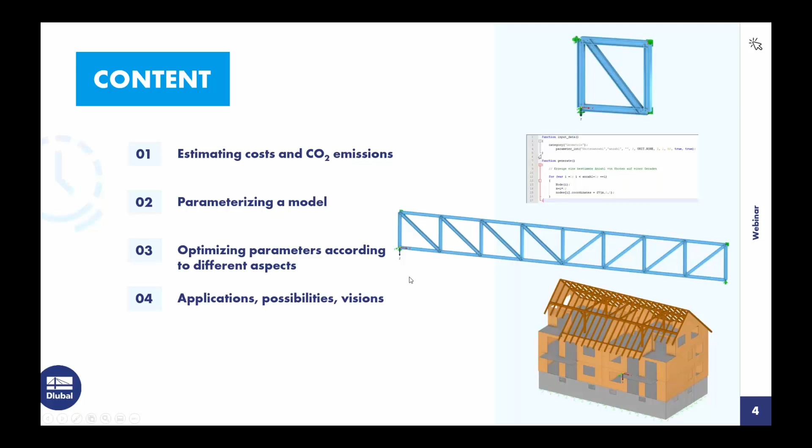Finally, we take a look at these cost estimations and CO2 emissions on a typical user structure, something like this apartment building structure here. So this is now the sign for me to change to the program, because I want to show you this live today. So I close this window and jump into RFEM, our new generation program.

Before we start with optimization and so on, we have to define a new model first. For example, I define a name, let's say PO1, and specify my tasks, what I want to do. When I speak about tasks, what's essential, I always change into this register, add-ons. This register shows you all our add-ons available in the program: design add-ons, analysis add-ons, special solutions, and here our focus add-on today, optimization and cost, CO2 emission estimation.

I agree, it's a quite complex name, but it should show you what it can do. It also has a special place in this menu because you see it's not allocated to special solutions or analysis add-ons. It's in this lower right corner, which should show you that it covers globally these design add-ons, but also the other add-ons. It lies like a skin overall, because if you want to optimize something, you have to consider nonlinear material and also designs.

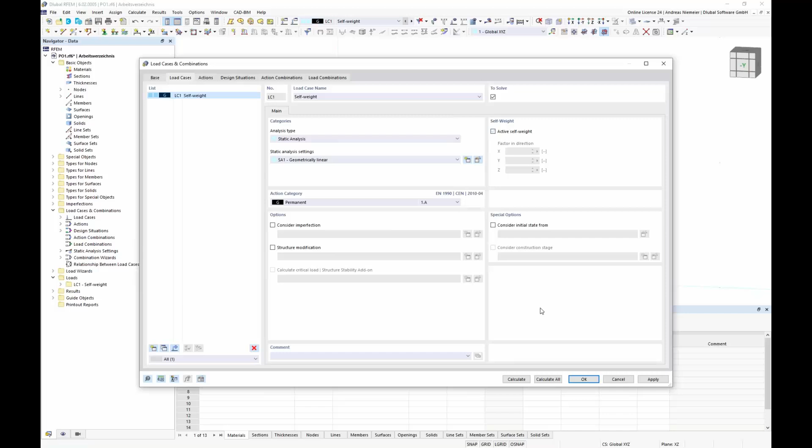There is no surface, no member, but I want to show you first which boundary conditions we have. So this means I want to load this element with a typical load, let's say with a unit load here. So no self-weight. I apply here only a nodal load, for example 100 kilonewtons, and this 100 kilonewtons should be carried from this element to 2 nodal supports on the left side.

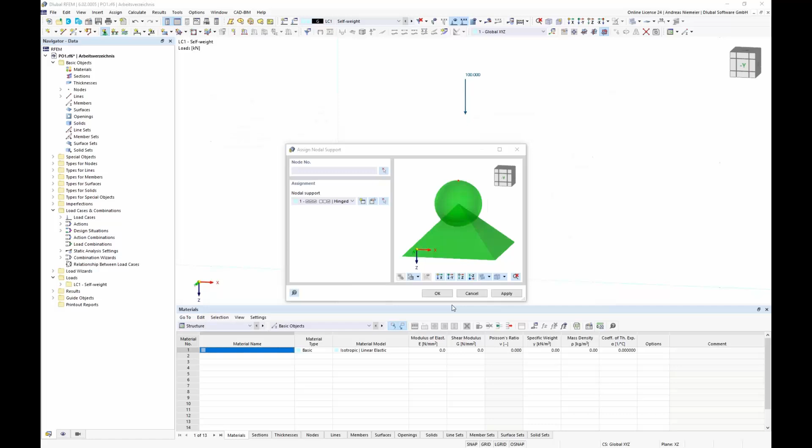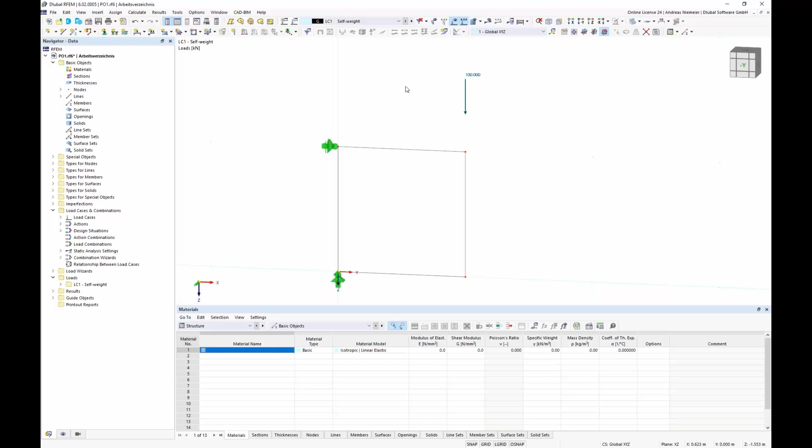So here the nodal support is on the bottom corner, a translational support in all directions. On the upper side we make also a new nodal support, but without having any constraints, so I place it here. And so that this structure cannot rotate around the global z-axis, I place also here 2 supports in y direction. So these are my boundary conditions and should show you my target place where I want to operate now.

So if you see this load and you see these supports we have, our task is how we can carry this force down to these supports. I can create here now, for example, a wall or a member set or a mixture of both or a solid. So everything is possible.

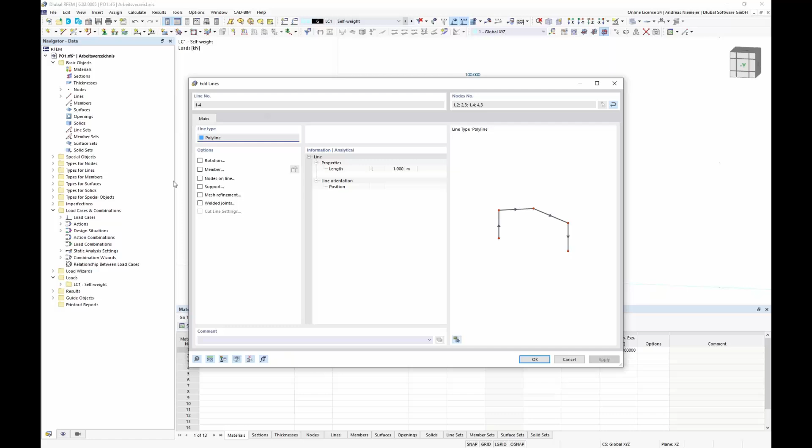But for explanation today, I use simple members. So I select all 4 lines and assign a member here. So go to options, member. I take here the member type beam and assign here a cross-section.

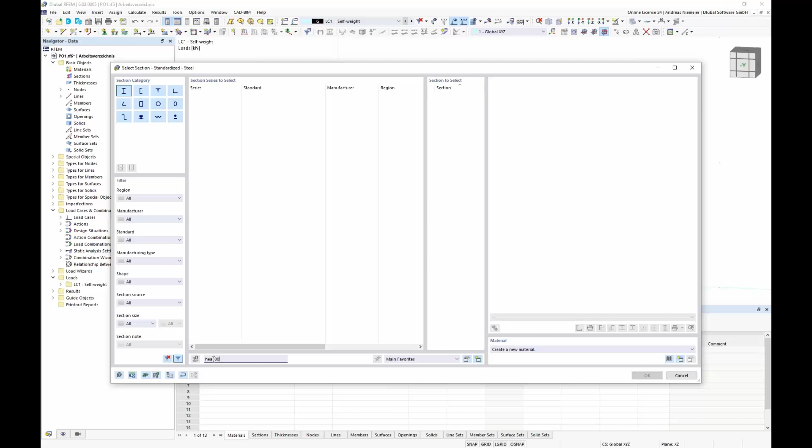For such examples I use always my favorite cross-section, an HEA 100, of course with writing a space here, and I select it here with a standard steel, so steel S235. So okay, after confirmation we get now these 4 HEA members.

They are connected, rigid, but this plays no bigger role here. It's only a structure what can carry the force down to the supports. This we can also check. So if I run the static analysis, you will see that we get here, of course, deflection.

So we have here 14 millimeters deflection, and of course we get here internal forces, normal axis forces, here tension, here compression, and even bending. So we can realize that this shear is transported via bending to the supports and produce here reactions.

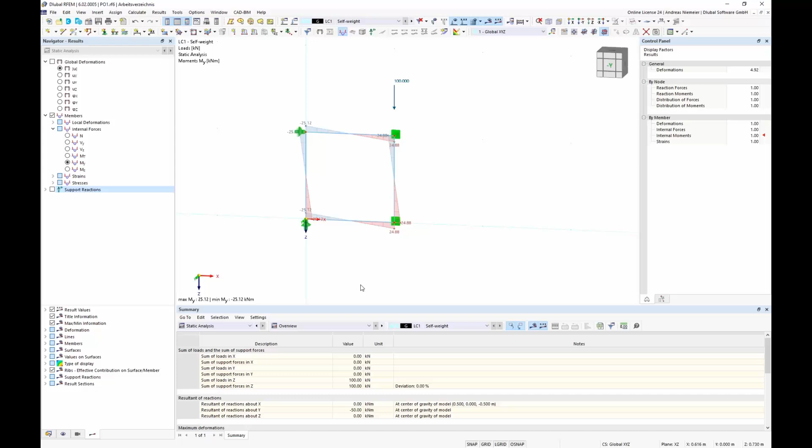So far everything is as expected, but as structural engineers, if you see this structure and even if you see this deflection shape, you would say, yes, nice structure, but we need a bracing in it. And I agree, I would also model here a bracing, but I don't want to tell the computer now what is the perfect place of the bracing.

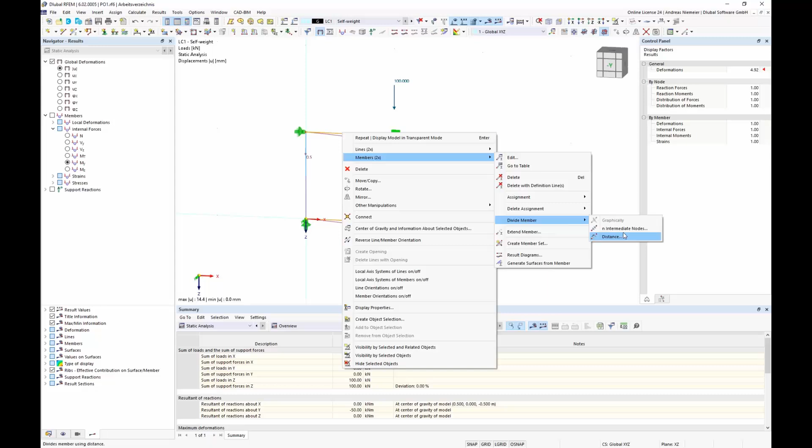I expect from the computer that he will tell me what is the perfect place of the bracing, and therefore I say here now, please have here a bracing in the middle. So I divide the member with intermediate nodes, create here a middle node by placing the node on member, and then I take here one leg and copy it here in the middle. So far we have now a bracing.

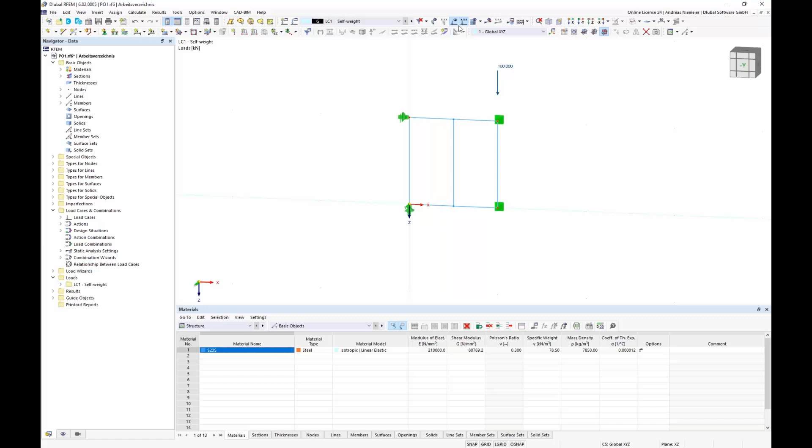I don't want to say now if the place or orientation is good, it's only a, let's say, stupid bracing. And if we run analysis again, we will see, of course, this bracing increased the stiffness, and we could reduce the deflection to, let's say, 8 millimeters. But the deflection shape is still the same, and we can think about the orientation or inclination of the bracing.

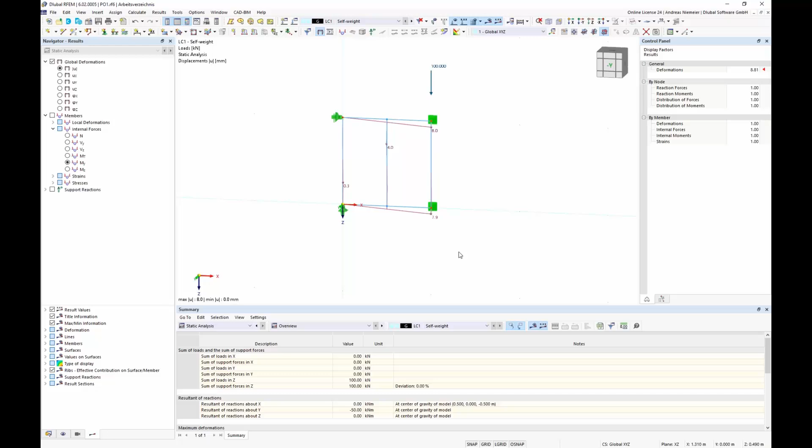And I would say now this is a job for RFEM, for the computer itself, and that RFEM can find a right place for this bracing. We have to give the computer the information about what he can change to find the right place. And here it's clear for us we can maybe move this node in left direction or right direction here, and even here move the node in left or right direction.

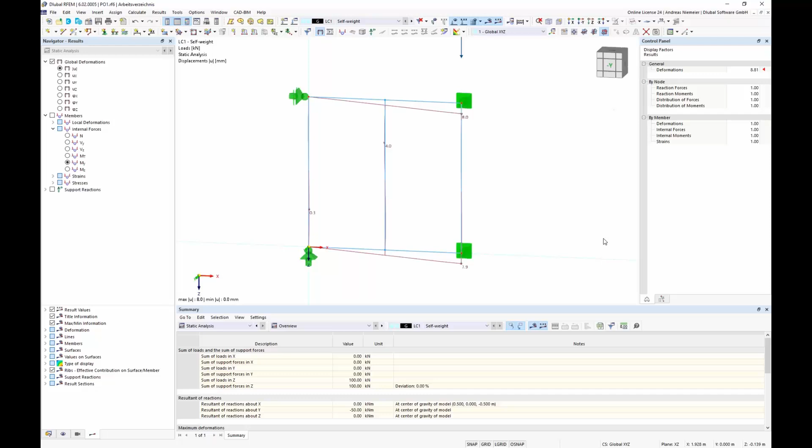For this I define two parameters. I go here to edit, global parameters, and here I have a parameter list where I can specify - I say the first parameter is x top, and the second is x bottom. The parameter gets the unit type length, with in this case 0. Of course I can write a value here, but I want to have 0.

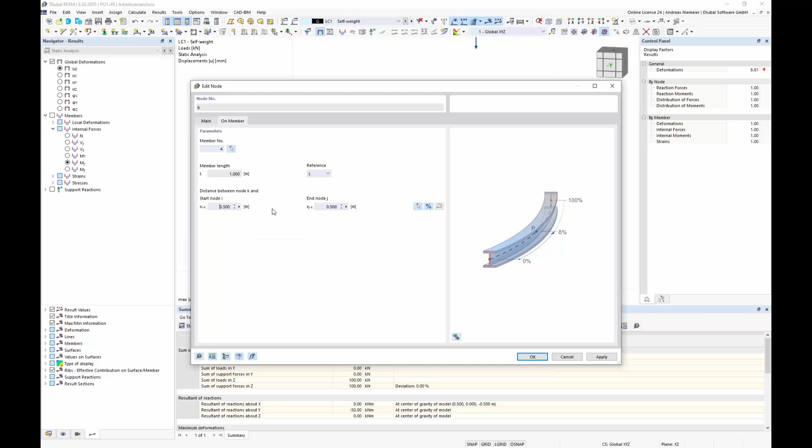Now I use this length parameter to place and move this node. For this, you go into the node properties, change here to length definition, go to this black triangle and open this formula editor. You see you have a big white box where you can write a lot, and we can say here 0.5 meter plus x top. You see the program calculates directly the result of this parameter - it's 0.5 because x top is 0.

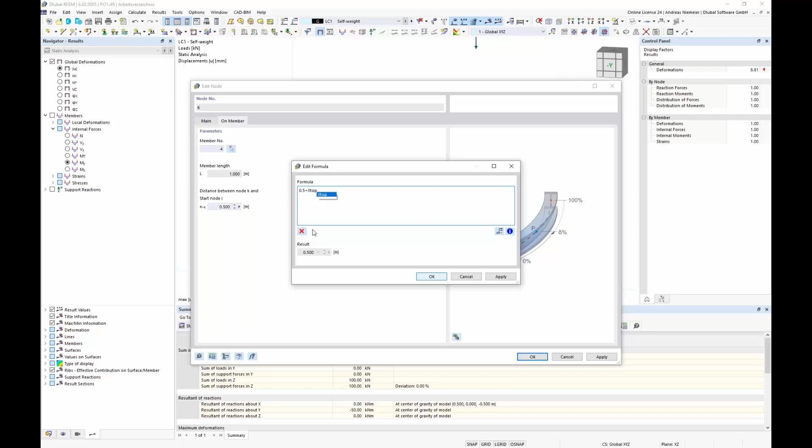But when we go into this parameter list and change this parameter to 0.1, you will see the program is moving this node. So we connected now the geometry to this parameter. The same we can do for the bottom.

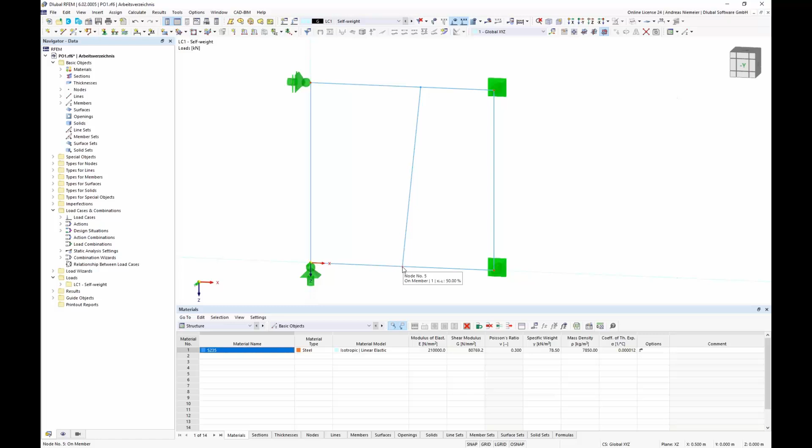Here I want to go one step further. What we wrote in this formula editor was 0.5 as a fixed value. But what happens if you move this node and it's not 0.5 but something else? So to cover this, you can go into the node details, change it to meter or length as before, and open it again.

But maybe you realized we have two buttons here. The button with the i is an information button which gives you a command list of what you can use to connect to properties of the program inputs. This is JavaScript style and allows you to connect to every element of the program by a JavaScript code.

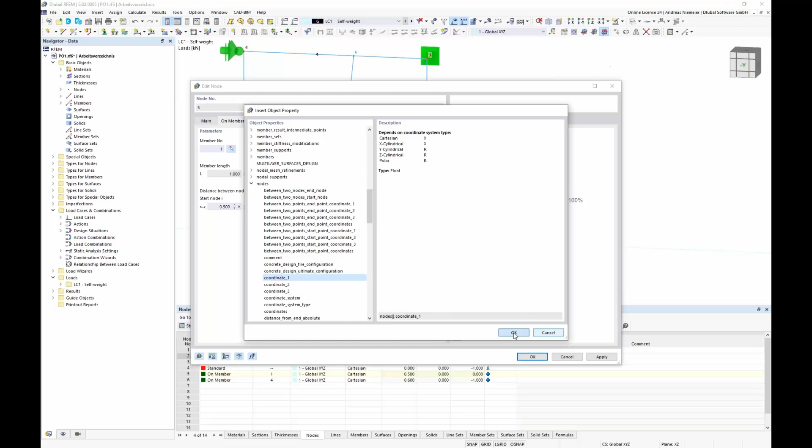For example, if we want to connect to the node coordinates of node number 2, we can go again into the node property, formula editor, and type 'n' for nodes - you see you get commands for what touches the node. For coordinate x you will see you can connect to the x coordinate. If you confirm this command and write node 2, you get the value 1, which is written in the table, and you can divide this by 2, giving us half a meter plus x bottom.

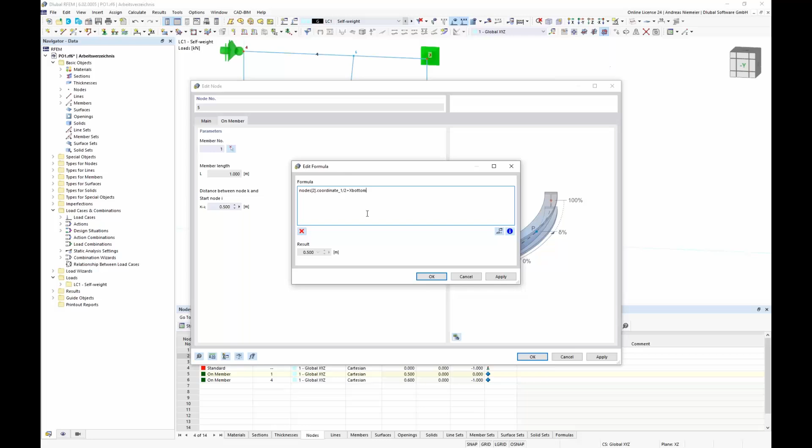So you can write your own code to work with values of the input data itself, enabling you to make a good parameterization of your model. Now we have an option to change this bracing member in both directions by typing in these values. Of course this is not the optimal place - it's much more optimal when we move it completely to the right and left side. But this is the task of the computer later.

So now we have done this parameterization, but the question remains how the optimization can work with these parameters. The optimization, which we activated in the base data, enables you below to call the optimization settings menu. You see here you have a few options and values to optimize. Unfortunately this list is empty, because we have to declare which variables of the formulas of the global parameters should be optimized.

For this, if you open the scheme again, you will see below the column 'definition type' a few options - we have values, formulas, optimization, and some special types of optimization. If you give this parameter the type optimization, you will see it going red. This means something is missing, and the cause is because it wants a range for optimization - from which value to which value the parameter could go.

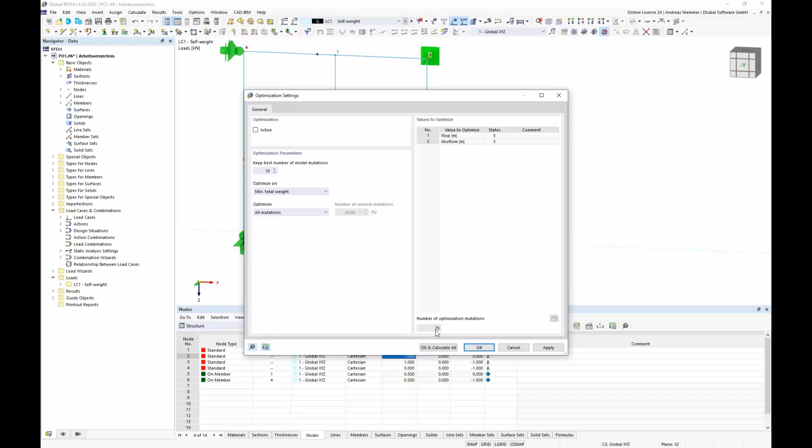So there exist 25 different situations, what means for us 25 different models where we have different geometries in this case. And we defined here the name mutations for these different models.

And now if we want to find the best solution, let's say best in brackets, we can maybe activate it here with this check, and you get 3 options to specify. The program asks us keep best numbers of model mutations, and here is written in standard 10.

The question is best models. Of course, here we speak about 25, so it's not so crucial. But you can also work with 1 million, then you don't want to read 1 million. So it's interesting only to store the best 10 results. But for our upcoming analysis, we can write all, only to understand what happens.

Then, because the word best cries to the question, what is the best? And here we have to specify below the chapter optimize on when the program is changing these variables. The question is, what is good? Should he find a minimum total weight? Should he find a minimum vectorial displacement, deformation, minimum cost, or minimum CO2 emission? So you see, this is a criteria. For our first try, I use maybe vectorial displacement.

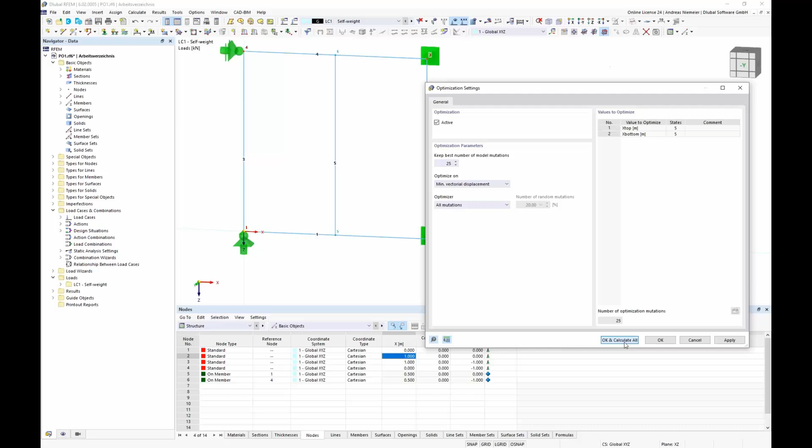And if we do this, and start here OK and calculate all, the program is opening a calculation process, but it's looking a little bit different. It's a more optimization process where you see which optimizations are done.

And in background you see what is changing. He calculates the different mutations, and even if he finished the calculation of one mutation, he logs it down in the table connected to these 10 best results, for example. Now we log down to 25 best results, and you see he has here measured the vectorial displacement and the corresponding parameter set. The best vectorial displacement, for example, here happened now with solution number 5.

If he moves the top node 0.4 meters right and the bottom minus 0.4 meters left, so this is, let's say, our expected place, what is really good. All others are not so good, so you see we get here bigger deflections. But of course it's a stupid process because he calculates all available.

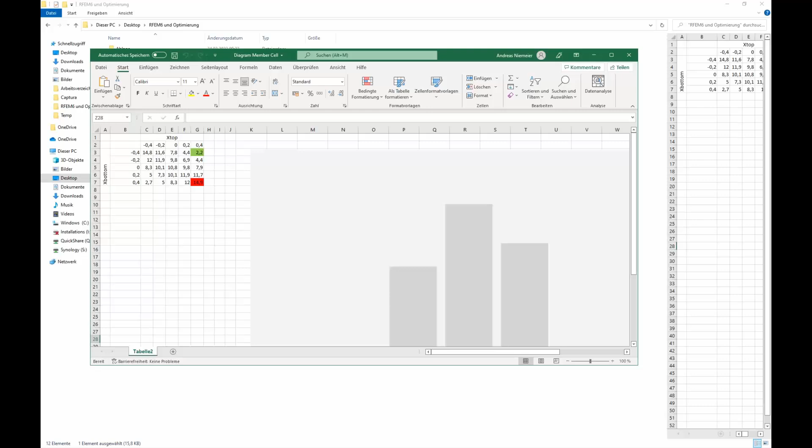To understand it much better, I defined here a spreadsheet with a diagram to explain it in a different way. So I interpreted all these results, what this process gives you, here with a surface diagram with this matrix.

And you see we have here our x top and x bottom value, what running from minus 0.4 to positive 0.4. And if we set maybe parameter 0.4 positive and at the same time the bottom to minus 0.4, we get the minimum deflection. We end up here.

A second minimum we get maybe if we make it vice versa, minus 0.4 and positive 0.4, then we get here this minimum. But if you see all other solutions have here a buckle that gives us bigger deflections, are not so good. And now you see which result space the program is working on, and then regarding this situation we are interested always in these minimums here.

If we jump back now to our program, you see meanwhile he's already done with his analysis. He's on the 22nd solution, and meanwhile the list is filled with the results I just presented on this matrix.

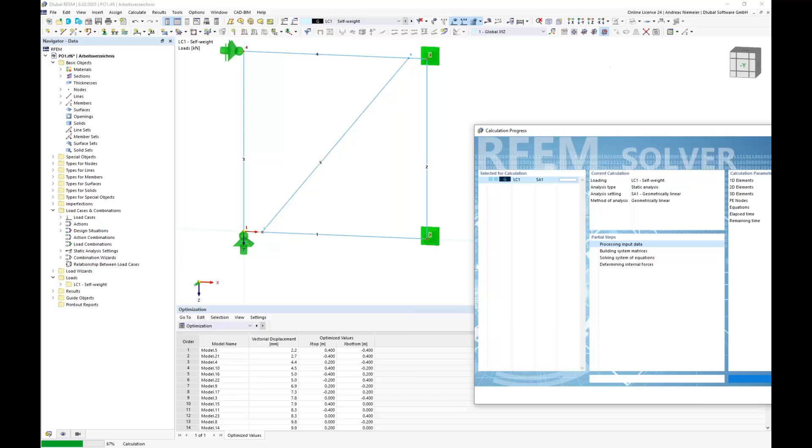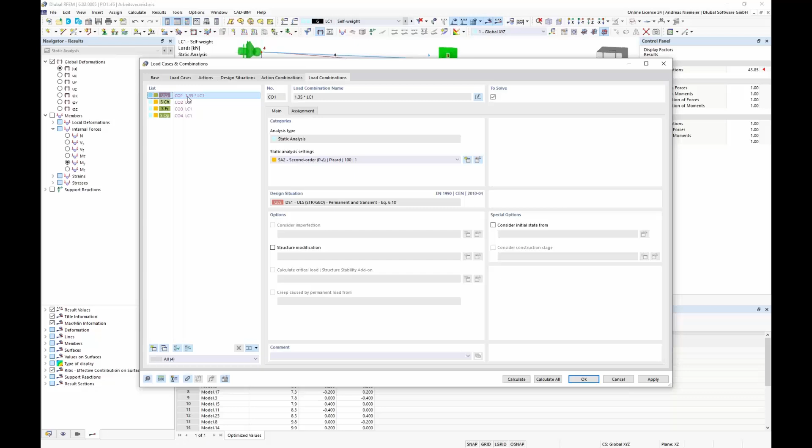Of course he also calculates some stupid solutions, but this comes only from the process of trying to use all values. What I want to show you with this step is that you have to wait at least the calculation for 25 models to get a result, to find out that maybe model 5 with this parameter layout gives the best result. We have here 2.2 millimeters, but this comes because the program is directly considering this design situation with increased values, where there's this partial safety factor — when we calculate this, you get exactly this 2.2 millimeters.

So now the question arises, can we do this faster? And yes, we can. So we set back this structure to its original place — this is the best parameter set that he found. But we ask the program again to find this solution much faster with a learning process.

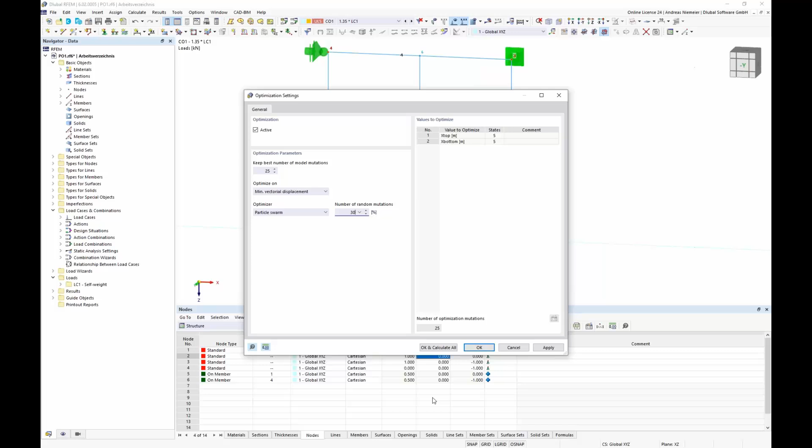We go back to this menu, optimization settings, activate it again, and say now please use as optimizer this particle swarm algorithm, which is a learning process using only a fraction of all possible variants or mutations. So I say, as a basic input, for example 30%, which means 7 elements of all, and the task is now to find a good result within the calculation of 7 mutations — and for this he has to start the process.

For this he has to start with a random selection of parameters, do its calculation, and realize, okay, my first calculation gives not such a good result. Then he tries to find a better parameter set by knowing what gave him a bad result, and finding a better deflection until the 7 mutations are over.

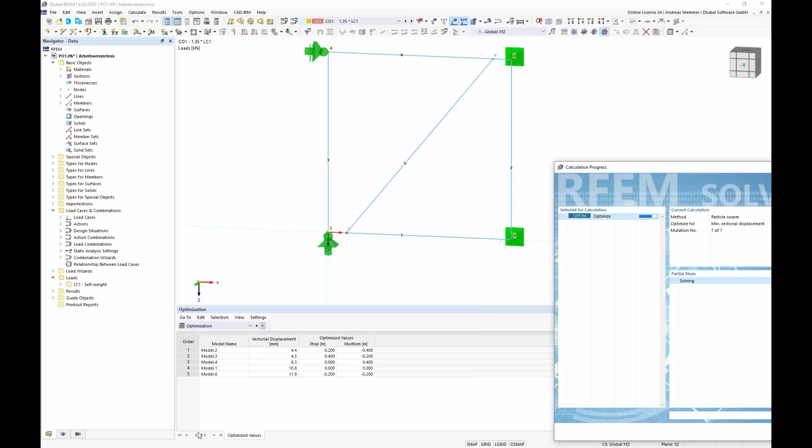So his game is to find a good solution within the 7 solutions. And you see now the program was able, by using this self-learning process, to find within the calculation of 7 models a really good solution. Maybe he already found the best solution here, but that's not a must-have.

The case is more to find as good a solution as possible, but you can save time with this process, because he learns — maybe when he first starts with such a solution — that he has to change the parameter to get a smaller solution, and then he can learn that he shouldn't increase the value in this direction but more in that direction.

This particle swarm algorithm, or the algorithm behind it, imitates or mimics the behavior of an animal swarm — for example a fish swarm or bird swarm — where every individual, which here is maybe a set of parameters, tries to stay as close as possible and not travel away from the group. So he doesn't search places in the outer space, and also the individuals don't occupy the same place, so he doesn't find solutions that are similar, always searching in the same place.

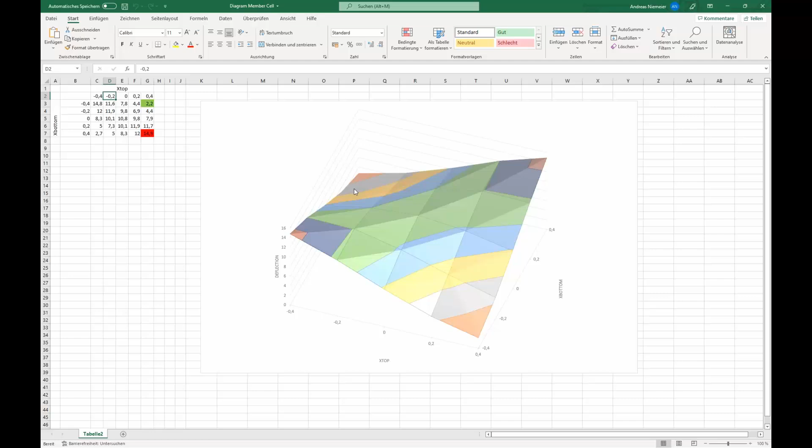And because these swarms have a need to rest, maybe in reality, the need increases as they get closer to the resting place, and mimicking this behavior helps to find these optimums here on this corner or that corner. So maybe we could prove this a little bit with this short introduction.

Now I want to open this topic by mentioning what we can use this for, because if you take a look at this cell, it's part of a truss girder, for example. And now the question could arise — thinking about my life as a civil engineer — if you try to use a truss girder for supporting some loads, the question appears: how many cells should I have?

Do I need 10, 20? I don't know. Then I can change the height of the truss girder — that's also unclear — and even the cross section, for example. What is always static or fixed is the length and the load. I can't change those so easily, but what I can change is maybe the geometry of the truss girder.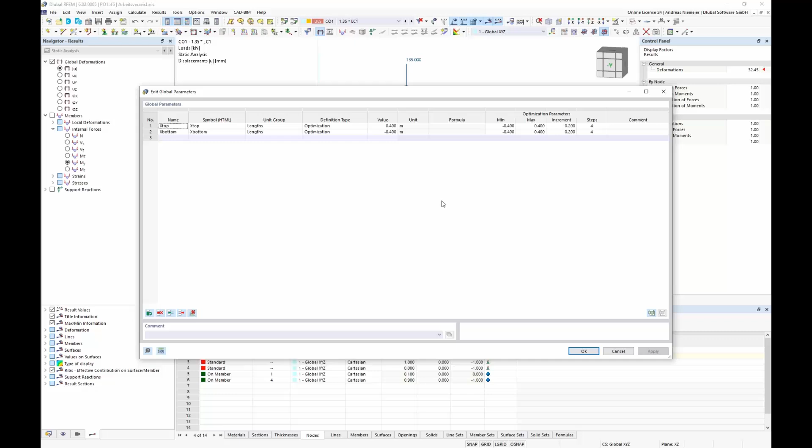But if you take a look at this current parametrization, you'll see — yeah, nice, of course I can use it for truss girders — but this technology only allows me to change the length and not the amount of elements. I agree, this isn't possible here, and this is maybe the limitation of our old generation of RFEM 5. But with RFEM 6, we got a new, mighty...

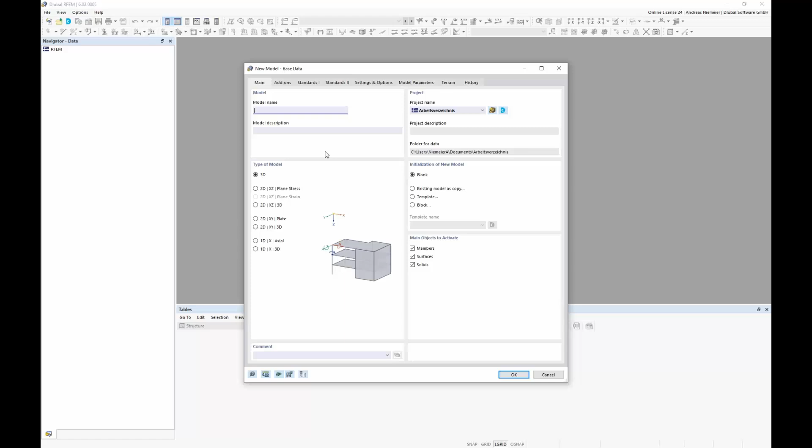We got this JavaScript technology I just showed you before, where I can write per code elements. I want to open this case by opening a new model where we create, maybe here PO2 or truss girder, and I want to show you how you can create new elements by a parameter, what represents our task for a truss girder, because in a truss girder you also have to say I need 5 cells, 10 cells, meaning more members or less members. I want to show you now how you can control the amount of elements by using these functions in the program.

As mentioned before, in RFEM 6 we have this JavaScript command catalog where you can connect to any element in the data block. And additionally we have a script manager which allows you to store this stuff.

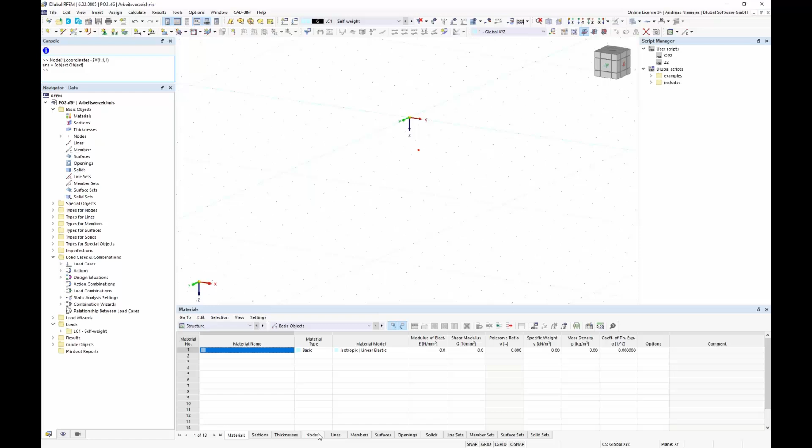How is this working? At the moment it seems quite cryptic, but for example, we want to specify a new node. So we write in the console, first checking the command for it. We want to create a new node, maybe here in parentheses, node 1 dot coordinates, and the coordinates are a vector at the place 1 meter, 1 meter, 1 meter. So with confirmation we can create now a new node at 1, 1, 1.

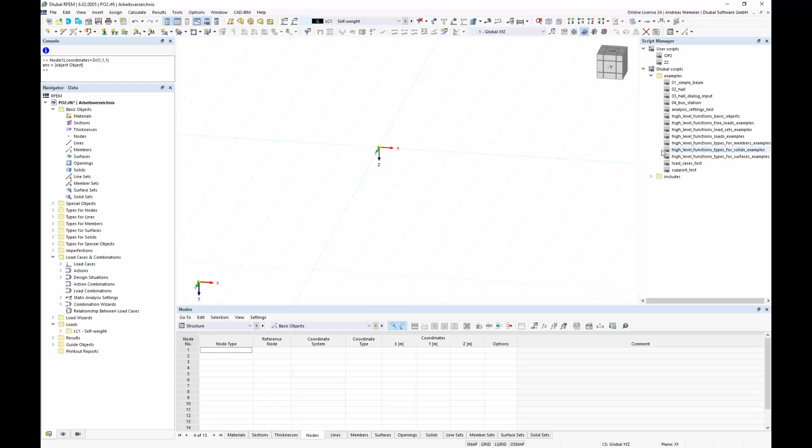So this is possible right now. You can define new elements on this console, not only a node, so there's more possible. If you look in the script manager on the right side, you have, for example, a simple beam. If you double click on it, you get miraculously a new simple beam with supports and loads and so on. So you can even create complete models with this technology.

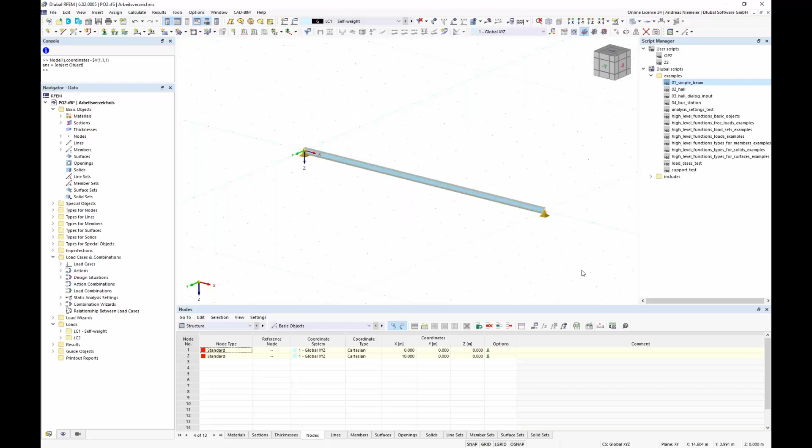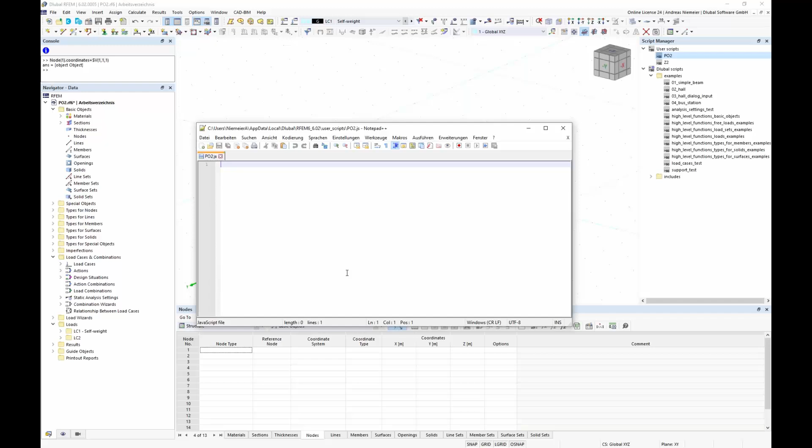Let's increase this topic, how you can create such a script, because here we only used the console. So I copy this command, Ctrl-C, and create a new script. We delete this last one, and make a new script. We call it PO2. Then we can open it with an editor. I use this Notepad++ editor, but you can use any editor you want. It's only a JS file, and here we can write comments.

For example, create one node, and I insert what I just wrote into the console. Node 1 coordinates and so on, and I store this and double click PO2, and you will see you get this node again. So here you have the chance to write down what you want and store it in these scripts. Not so crucial, I would say.

Now back to our idea. We want to create more elements at once. How can you do this? I delete this again and open my file and say, please create more nodes on one line.

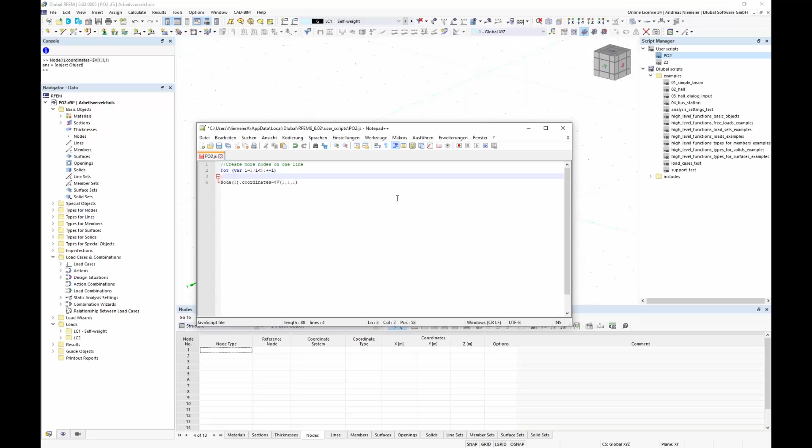How to do this? If you work with more elements, you have to write, for example, a for loop. For a running variable, here variable I, which is 1 in the beginning, it should increase the variable until this variable is smaller than 5, and it should increase I always with an increment of 1. In this loop, it should do something: it should always create a new node with the number I as it increases, and then create for every step an x coordinate, where x is, for example, I multiplied with 1 meter.

And it should move this information as a node into the node table. So we write nodes I dot coordinates, and as a vector again, dollar vector, and here we write x coordinate, comma 0, 0, so that we have nodes in a line. Then we can close this command. The rest we delete, we don't need it anymore, and we store this. If we run this again, you will see, if I made everything right, we get a few nodes in one line.

Because we stopped before 5, we get only 4 nodes. If you say now, I want to have control over how many nodes, for example compared to how many cells, we open it again. No big deal: we say create a specific amount of nodes on one line. Here we have a parameter variable, amount, is 5 or 7 for example, and then we use this amount in the loop, amount plus 1. If we do this again, delete these nodes here, we get 7 nodes as written in this parameter.

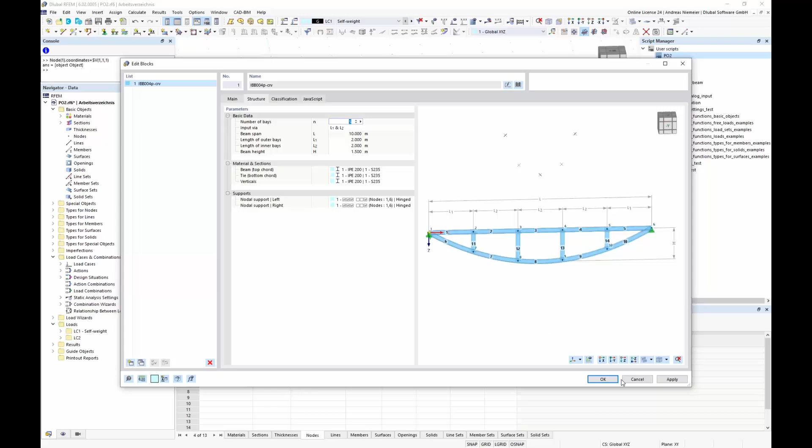Now we only have to take our code with these nodes and move it into this block logic. This is not such a big deal. We only have to write here in the front that it should generate something.

So we need here the keyword or the function, 'function generate', and make here a curly bracket again. So nothing more. And now we have to store this file.

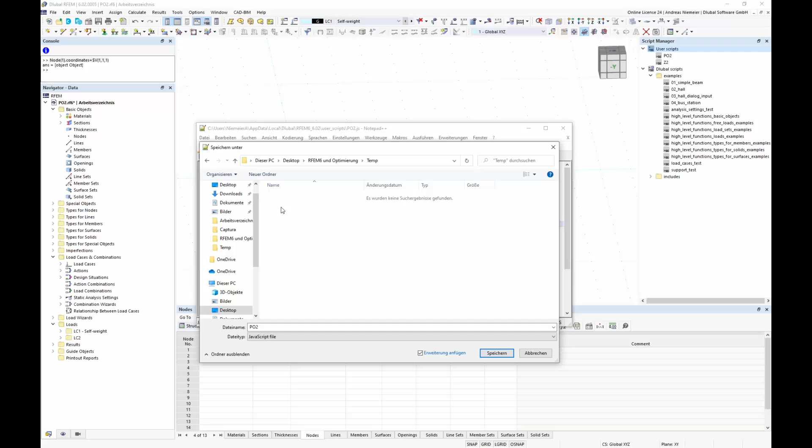Maybe I prepared a folder for today's presentation below my temp folder. Now I say in the program, please save this file as a block, maybe named PO2. He should select it here below for beams, for example, and I use this JavaScript file below temp2.

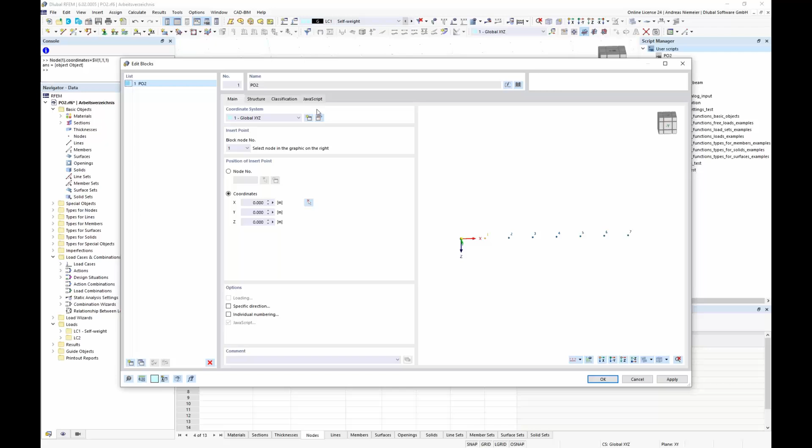And if I confirm this, the program overtakes this JavaScript file as a block into our block manager. If we open the block manager again, we will get this block here. I search for PO2, and you will see we get our nodes, 7 elements, here's our code, everything clear. Now let's connect it, and we see we have no structure.

Yeah, because we don't define it. It's clear, but now we do the last step and connect it with input. For this, you can open it again here and add, let's say, an input block.

We say here 'function input data', open a region, and write down a header, for example, category, geometry.

Of course, all commands I'm using here, we have documentation we can send you afterwards. This should not be the deal, I only want to show you how it's working in basic concept. And below this header, we want to specify a parameter.

It's an integer parameter which has some properties. It has a name, the name is amount of nodes. The next is the parameter internally encoded as 'amount', what we use here below. Then a unit should not be specified for this integer value.

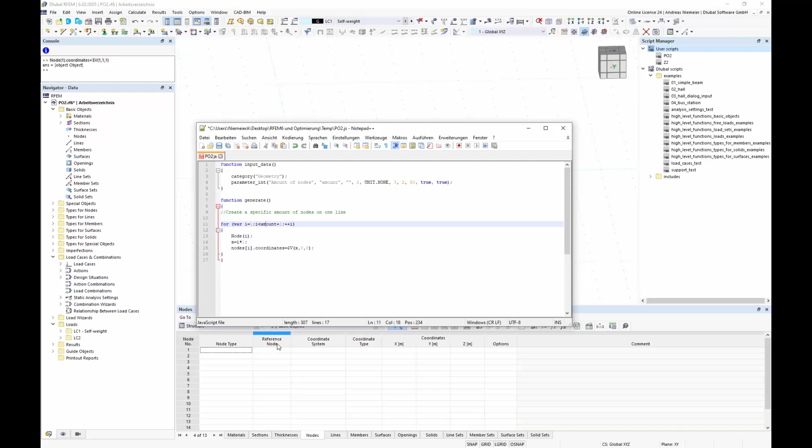Now we close this region and delete this fixed value so that we can connect this with this here. And if we save it, and save it again as block, PO2 category, for example, beams, and again our PO2 script file, and okay, we want to replace it, you will get here in the block manager

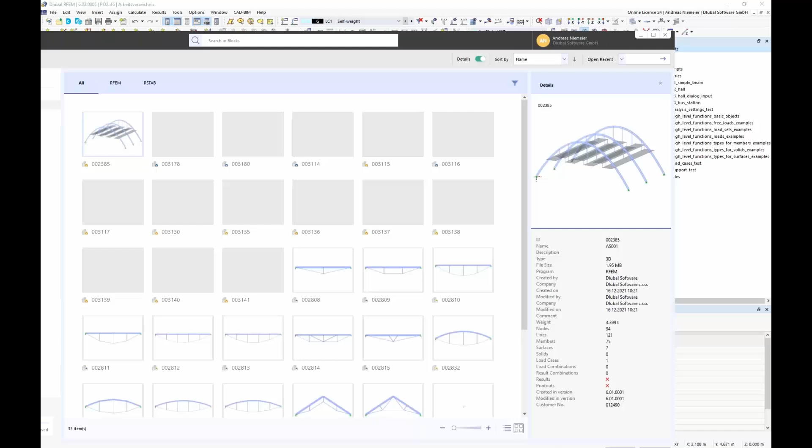below this, let's say PO2, our 3 nodes, 3 nodes, and you can change it here by any value.

And now we overtake it in the program, and you will see that you can have this block not only as stupid nodes but as compound elements below special objects, where we have this PO2, and we can connect here any parameter from the parameter list. So with this idea, we go back to our truss girder and use it.

So we delete this again and use now a predefined file for a truss girder with members I prepared for you, and I save it as block, truss girder 2, for example.

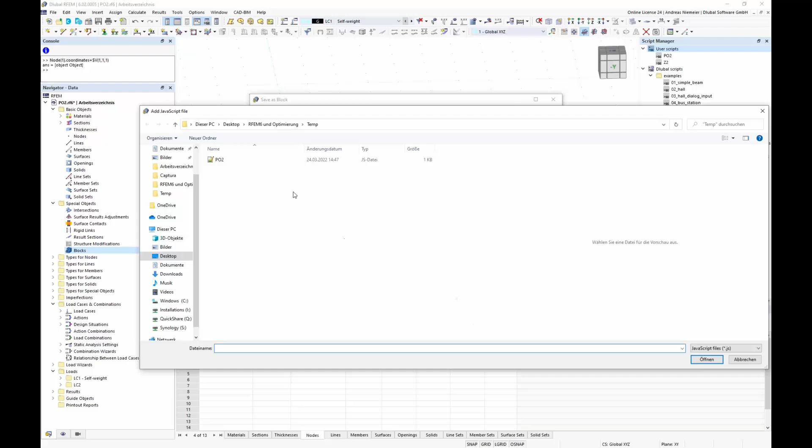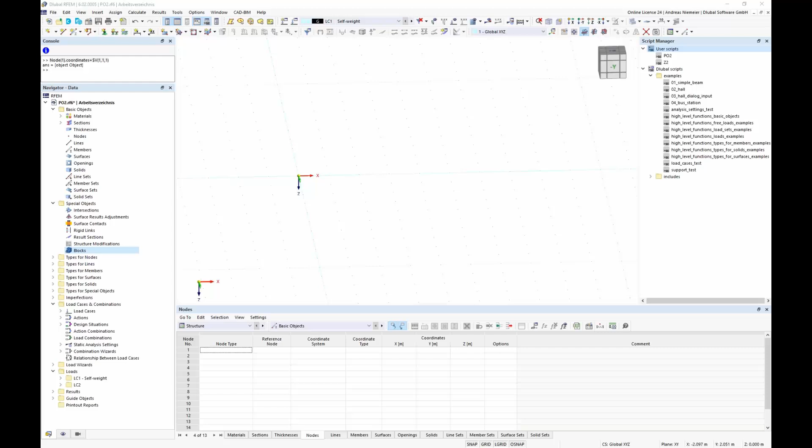We place it below beams, and I have here a file, truss girder, prepared, which models not only nodes, but also beams and loads. And if we read in this file as a block and get this block here, TG2,

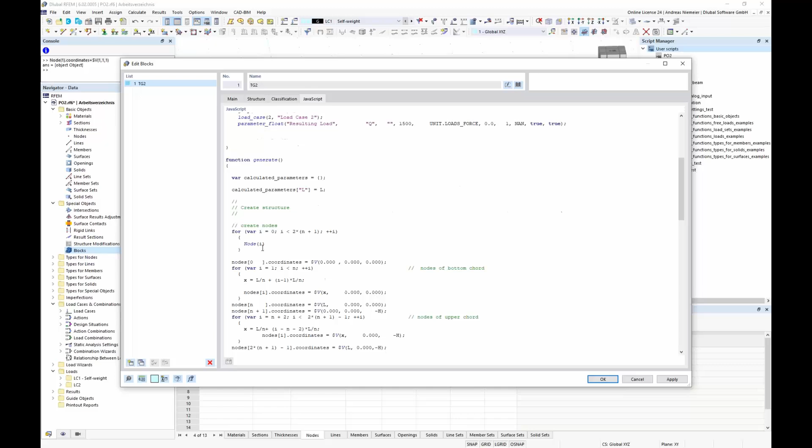then you see we have now a block which writes us an input file: function generate, nodes, member sets, loads, and so on. And here we can now specify we have 8 cells, we have a span of 20 meters, and we have a height of 0.5.

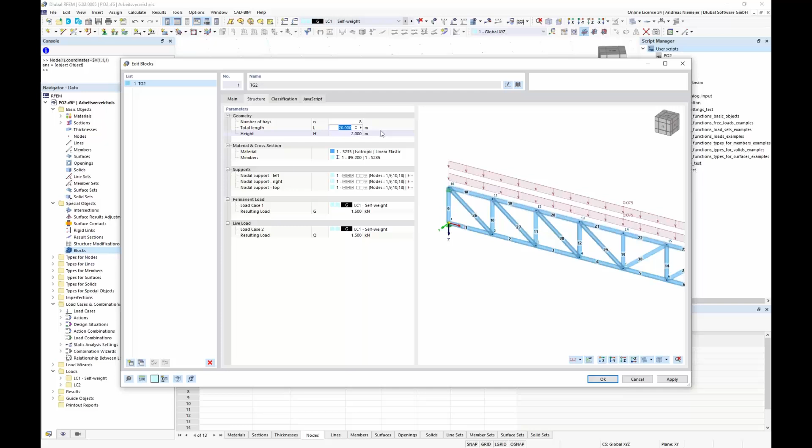It should start here with the material S235 with our favorite cross-section of HEA. We go here in the library, HEA.

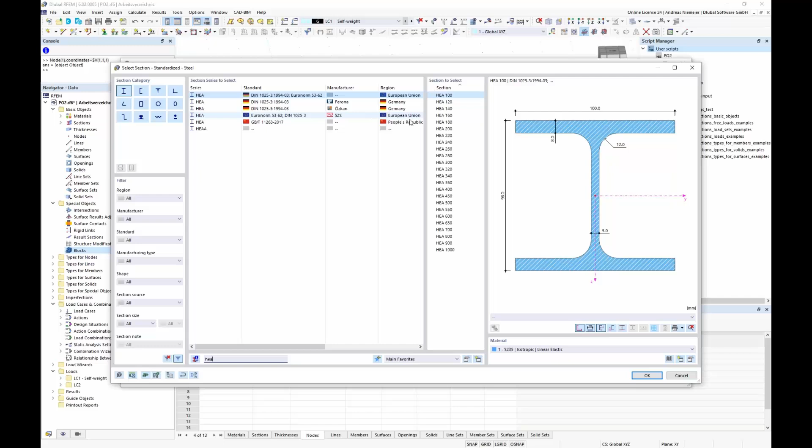100. We can specify initial supports. Here on the corner we use a rigid support in all degrees of freedom. The other is without constraint in x3, and the last support is so it doesn't fall out of the plane. So we have here node 1, node 2 and 3.

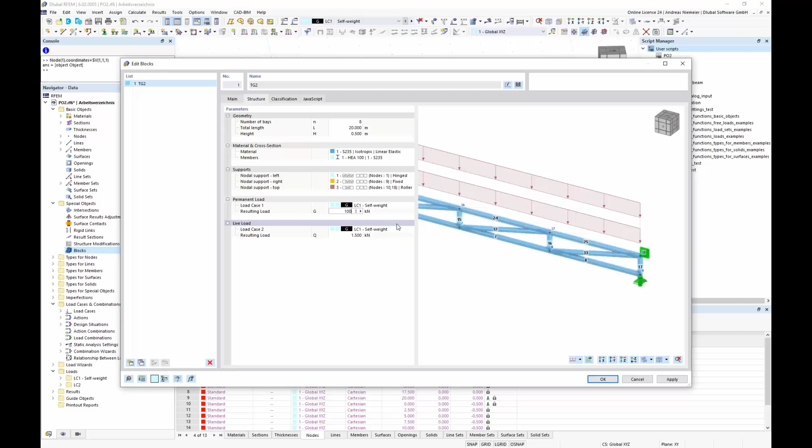And we have here also a clear support, and for the loading I defined it so that we get the sum of loads. For example, I have to carry 100 kilonewtons, distributed homogeneously over the full length, and as load cases we have a self-weight and maybe a live load or imposed load, and here we have to carry 200 kilonewtons.

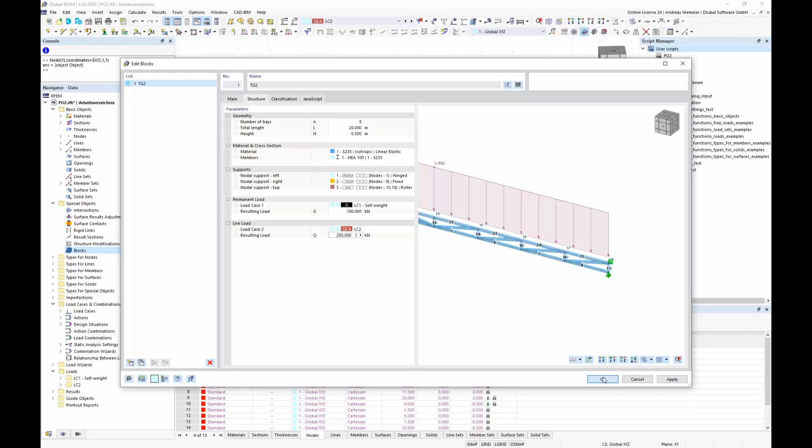With confirmation of these inputs we get here our truss girder system with 2 load cases, and now we can connect it to the optimization. So we connect here our optimization.

We specify here our parameters, for example cell, what is maybe an integer value. So we go here to model integer and write here, for example, 4, and because it's an optimization variable we say it should run from 4 to 10 with an increment of 2.

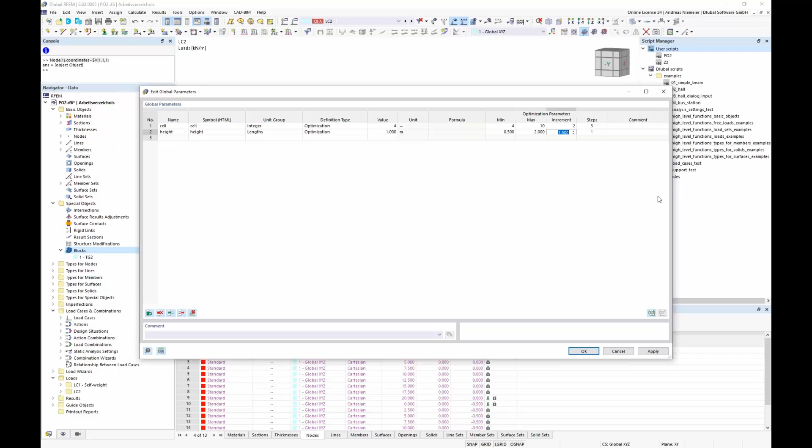And again we have, for example, also a height parameter. Here we have a length parameter what we set to 1 meter, and it's an optimization variable where we can say please run from 0.5 to 2 meters with a step of 0.5.

And now when we use these global parameters, optimization parameters, in the variable block and connect it here with these inputs, formula editor, cell, okay, and height.

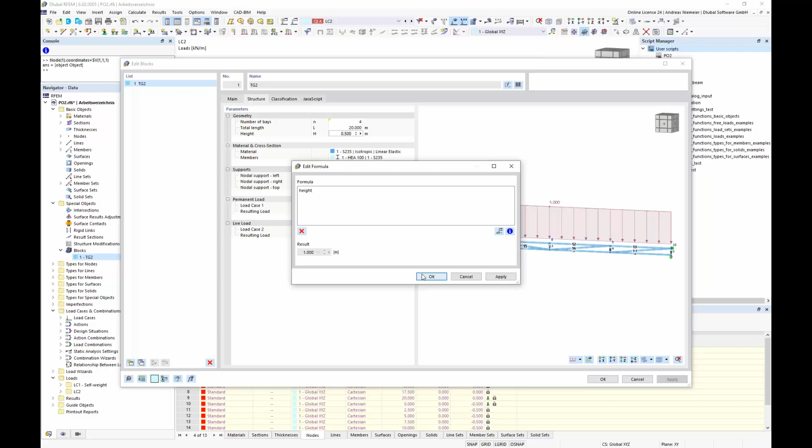Okay, and confirm it, the program says you have to modify the geometry behind, and you see we have now connected these global parameters with the block, and it uses the code to change the structure, not only the structure length but also the amount of elements.

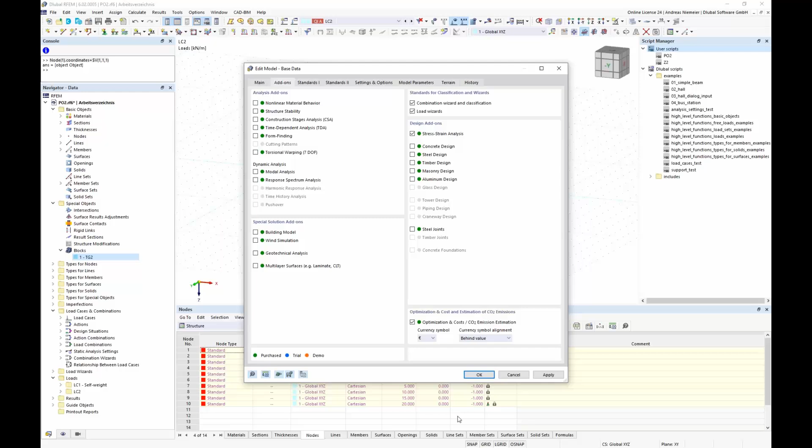And of course if we calculate now the structure, let's say for example here also with stresses or whatever, the design is not important. Only when we activate it, it will be considered.

So if we say, okay, you have here this combination so that it doesn't take so much time, I reduce this serviceability, and say here we use only linear calculation and calculate all, you will get the result, let's say deflection result and a utilization result.

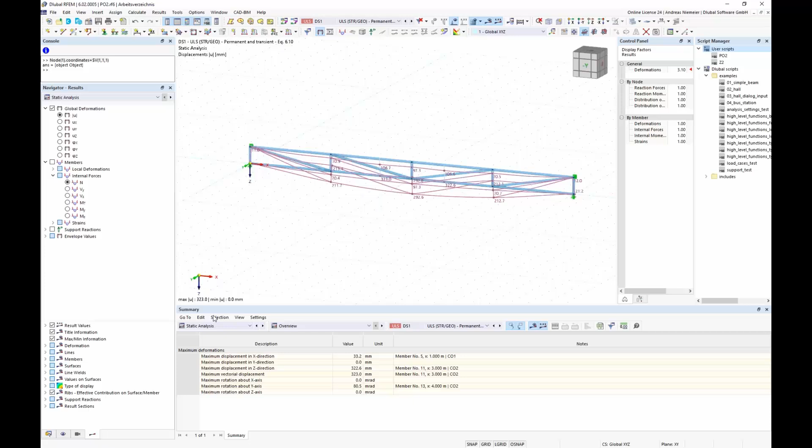And you see we get here deflection of almost 300 millimeters with a utilization of 5.06 so far. This means we have to get a better layout of structure for a good structure.

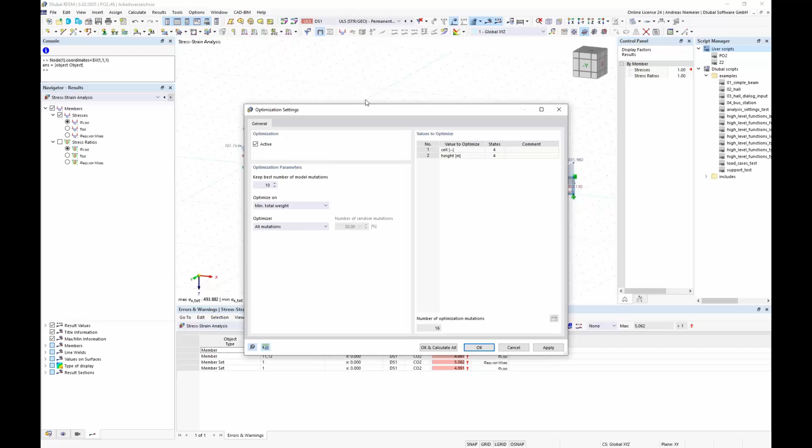And now if we run the optimization process here, if we check here, you see we have at the moment only the cell and height parameters, and the question happens: how can I maybe change cross sections, and how can I, for example, optimize according to cost?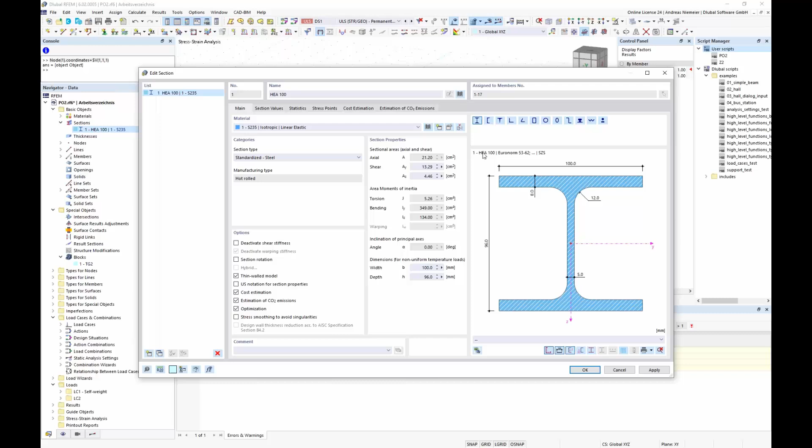And if he should optimize according to some costs, you will see you get here below the materials an option to activate the cost estimation and the CO2 estimation of emissions.

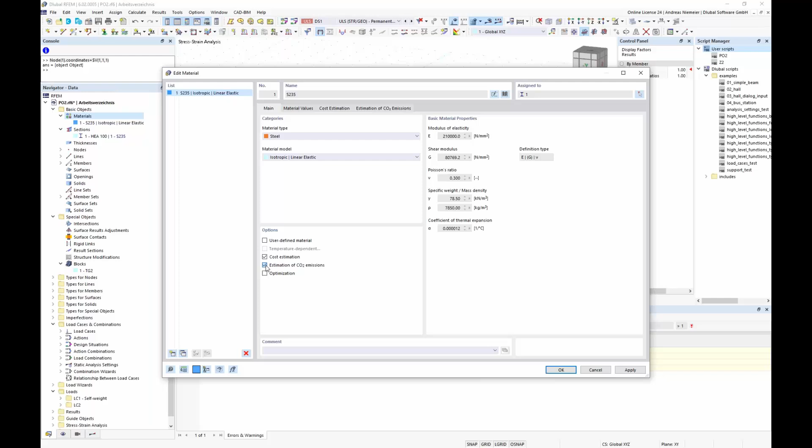And if you go to cost, you see you get an option to say here estimate according to solids and surfaces - we don't have those - and for members we can say the weight of the member is, for example, 1,600 euros per ton.

And now if we go back to our optimization settings, you will see even the sections appear now as parameters because we activated it here, and this ends up in 384 mutations, which takes a while to calculate.

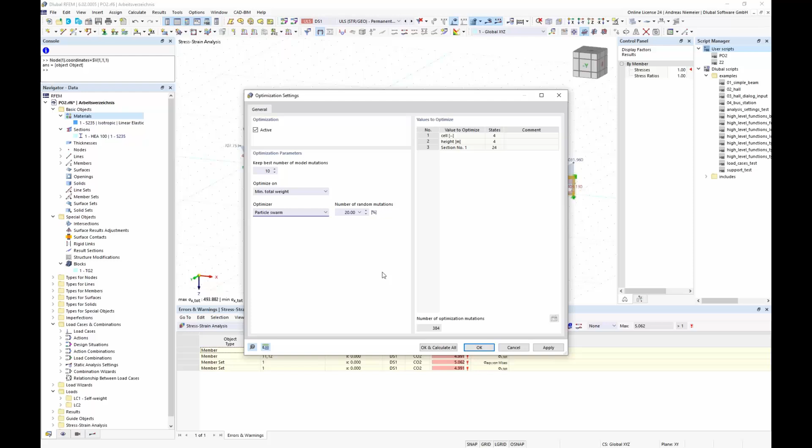So at least we should only work with a fraction and use the particle swarm. And if I do this, I don't want to start the calculation now because I prepared it already with final results, since I don't want to wait for this calculation of these mutations.

But with calculating 40 elements of these 384 possible solutions, you get here a list, and you see the optimization result ranges between 40,000 euros and 4,000 euros. So let's say the ones with HEA 1000 are uninteresting.

But if we take a look at this fraction here, you see with 10 cells and a height of 2 meters a HEA 160 is interesting, and with 8 cells and 2 meters a HEA 160. And we're playing here, maybe we can reduce the amount by 400 euros or by, let's say, 1,000 euros.

So there's a game to earn money only by finding good parameters. And this is, I think, a quite interesting topic to save money at least. Yeah.

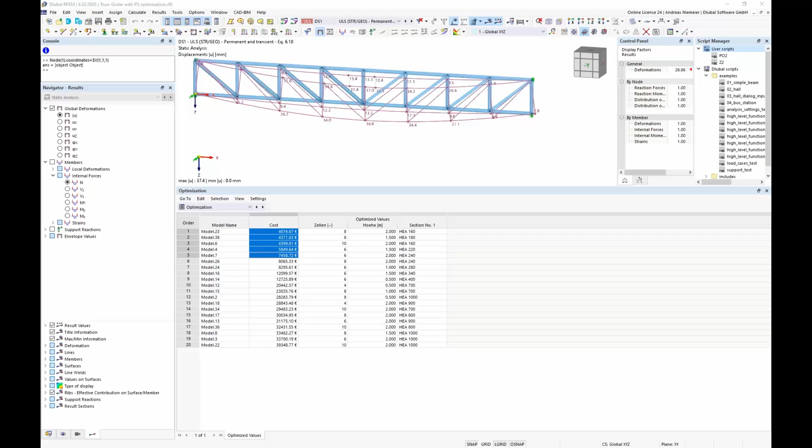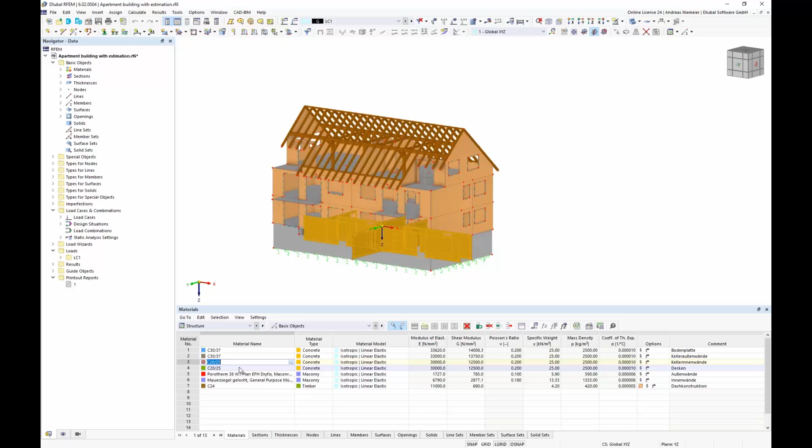So, this is now not only to optimize this, as you just saw, coming to my next point about these estimations. I prepared here a next file where you can use this not only for optimizations but also for other topics. Here I have a typical 3D model from our users, where we have some organization below, showing the slab, the outer basement walls, the inner basement walls, the other slabs, the outer clay brick walls, the inner clay brick walls, and the roof construction.

If you need this for an optimization task or only for emissions or estimations, you can use this option from the add-on. For example, if you only want to estimate costs, you can activate this cost for all materials and define for every type of element what should be covered or not. You can decide if it should only amount costs for surfaces, solids, or members, or even for surfaces for volume, and for top faces if you have some finery or painting on it.

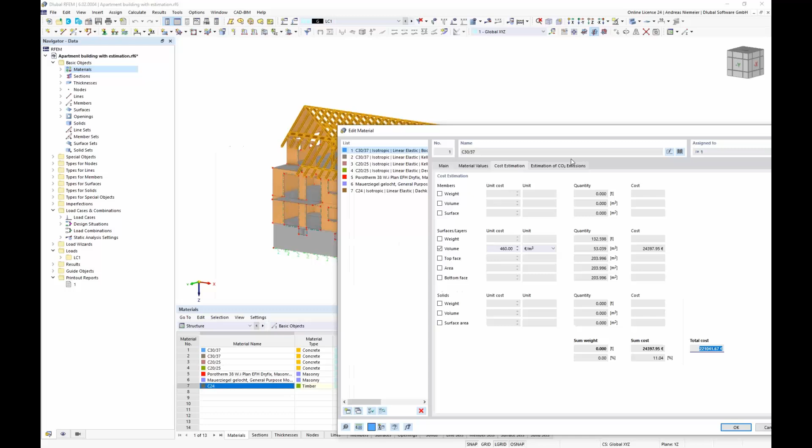So you can specify here some basic costs to get finally the amount of money, what is the cost about, for optimization reasons or only for calculations. In this example I used this logic of basement, floors, and roof and specified different parameters. I defined euros per unit, so I can estimate the total cost of 200,000 euros for these elements I modeled. Of course the size or height of the price depends on what I input, but it's in your hands here, and I think you know it much better than I do.

But we offered here a solution to define this more in detail per weight, per volume, or per surface, and for surfaces even for top and bottom face or the full surface. Because this logic was so clear, and at the moment sustainability also plays a big role, we added here not only these cost fractions but also the estimation of CO2 emissions as a similar input. But here you don't define the emission as euro per unit, but as CO2 equivalent per unit.

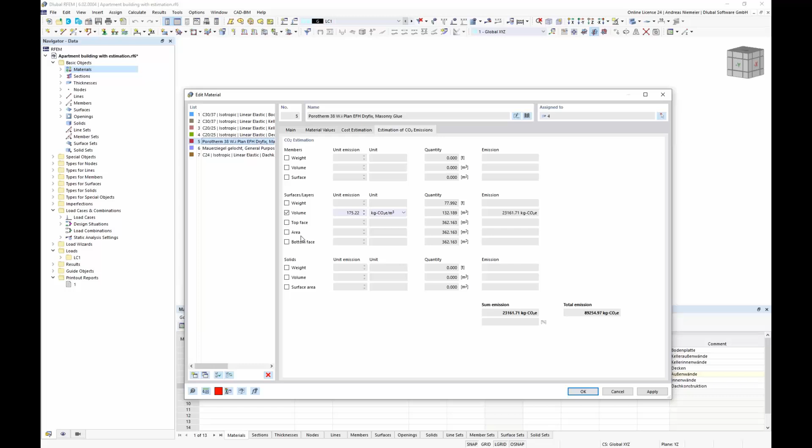I did a similar input here, per volume in this case. I used per volume always because I have in the background my optimization, and if I change the size I can handle it much better per volume. The value here was quite interesting, what I should use for clay bricks or for concrete. Here I used the database from our government.

I can change this also to English, where I can search according to some materials, for example timber, and you get for timber, according to this indicator global warming potential GWP, the CO2 equivalent values. What is quite interesting here is that concrete and all others gave us positive values, but timber gave negative ones.

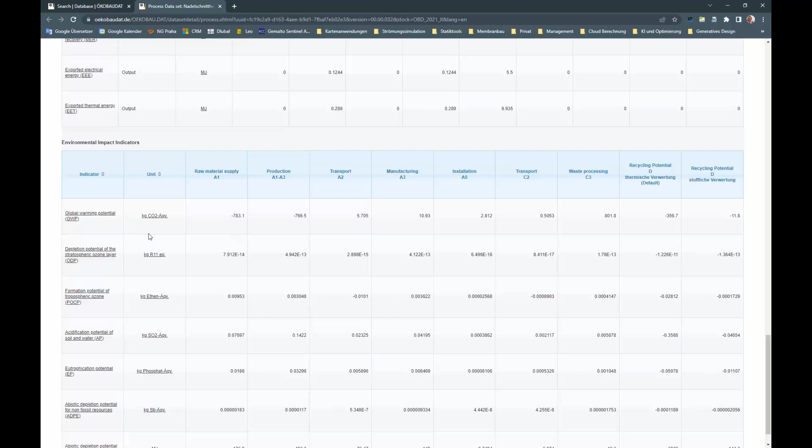And this is maybe the reason this makes it interesting regarding optimization, because here I can also consider negative emissions. Generally, if you do optimization it should result the same whether you use it per weight or per price or something like this, but regarding sustainable causes, with these negative values it could be interesting to optimize, and the program can find a solution with more timber, which is much better. So you can control it here with this stuff.

So with this add-on you get optimization and cost/CO2 estimation, two parts. In one part you get the optimization, what I just showed you before, and this sheet and material to estimate the cost and CO2 emission. But of course, as mentioned before, if you optimize something, you can rely on these figures here in this menu.

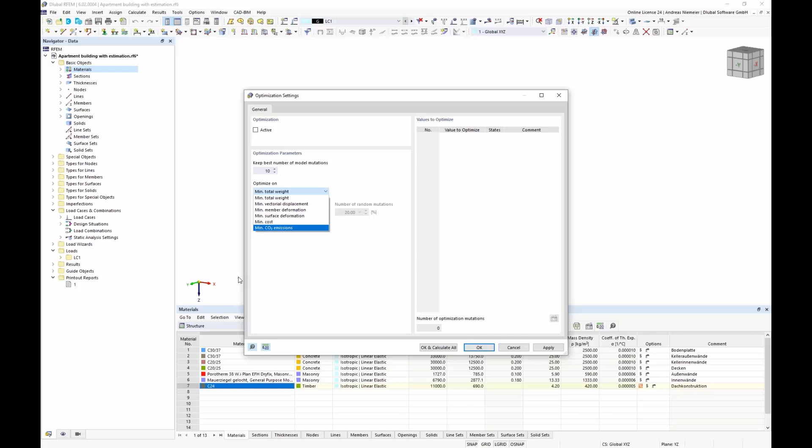So now I'm coming to my last point to close this webinar. Here I want to speak about our vision and possibilities of this add-on, because it's quite special, and to sum up what I showed you today. Today I showed you that you get now in our program environment an optimization machine, call it like this. This optimization machine can find good parameters, and these parameters could be defined by yourself in your structure. Of course, you can modify or parameterize your structure by changing length parameters or load size values. This is quite easy and was the first thread I showed you.

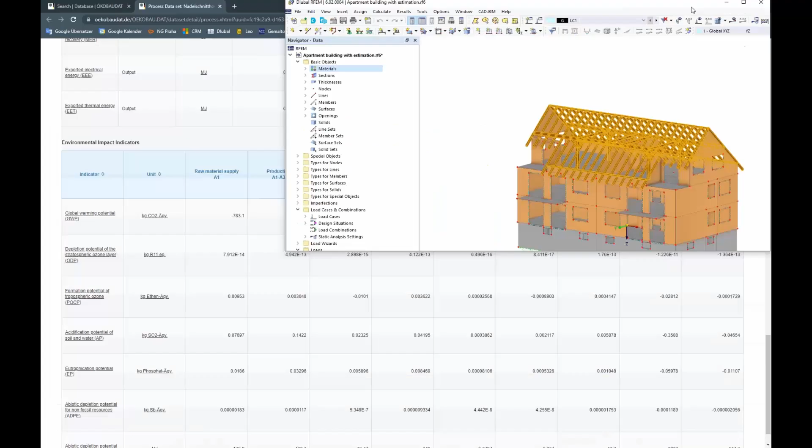But as mentioned, with the new mighty features of the new generation, you get the option to specify inside the program a JavaScript code which can connect all these inputs and create new values in these tables, to create new structures or grow up a new structure according to some parameters that could be optimized.

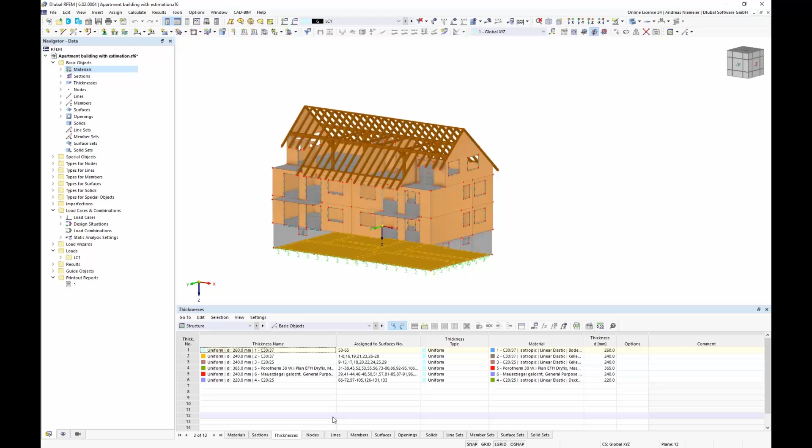And then a third stage, which I haven't shown, is that you can also create from several RFEM models, so from more windows like this, one big structure, and connect it via our web service to this optimization tool. I think all these three options give you a really mighty tool in your hand to find good structures for your work.

And maybe an easy idea of how you can start with such tools is, for example, if you imagine you have a steel hall or a timber hall, you can use this program to find a good distance between your frames, or you can use it for finding good distances of supports of continuous beams.

If you want to use it more advanced, you can use it, for example, to decide if you should use a frame with bending moment resistant frame joints, or if you should create this frame by cantilever columns. Or as mentioned just before, you can use it for deciding if you should use timber or concrete or aluminum or whatever, according to different reasons, maybe according to CO2 emission reasons.

So all these options you have, and this gives a lot of possibilities.